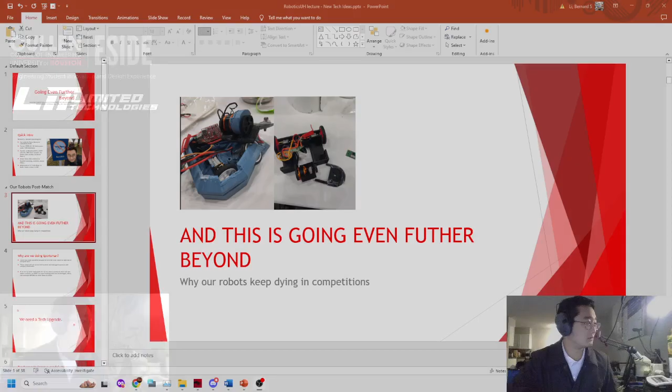So the objective of this presentation is very simple. We need to figure out why exactly we are still in plastic cans, right? Why our robots are still at least a couple of years behind.

Hang on one second. PowerPoint just broke on me for a second. Use presenter view. Okay. What?

There we go. We need to figure out what our situation is, how we can be better, and sort of learn a more fundamental approach, right? A lot of you guys have begun designing Battlebots, and that's really good news. A lot of you guys started building your own, that's also great news. But design without a sort of end goal as to what are we doing here is going to prove to be an issue. So my objective here today is: how do we take our robots and make them go even further beyond? How do we take them and say, here's where we're at now, here's where we're at in the future.

Okay. And then the arrow's not working. There we go. Yeah. So that's my intro.

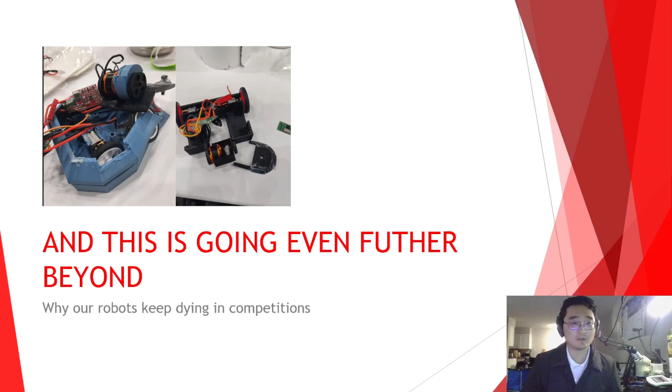So these are the two robots that I was last involved with. These are both Justin's. The one on the top is a snail, which survived very, very poorly. The other one was Justin's own custom, which also survived very poorly. Justin was made the president of the Robotics Club because he sent the most robots to fight. Regardless of success, he's had the most robots actually show up to a competition and fight out of everyone in the club.

And so, from those experiences, he's learned that these robots don't survive full combat most of the time, and they also damage complex and expensive electronics. Right? So whenever we break a Malenki, that hurts our budget a lot, especially because we're poorer than some of the orgs. So really, if we want to build robots that can survive above sportsman class, either in ant weight or plastic weight or fairy weight, we've got to start thinking about new ideas and concepts long before we send the robots into battle. Long before they're at competition, we need to have a good idea of, let's try this technology before we go. Alright? We need a technology upgrade.

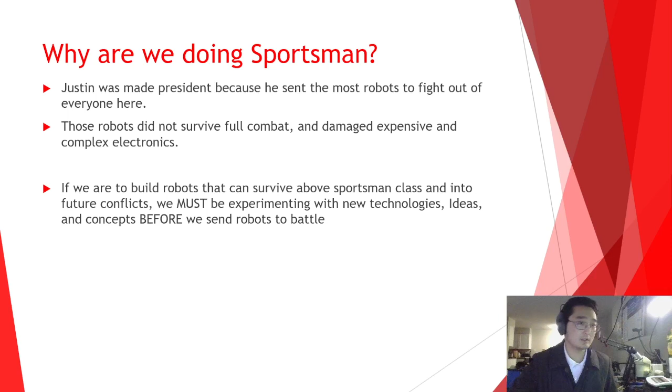And so these are the top 5 ways of improving robots, right? That we should probably be exploring. There's the need for armor upgrades. There's creating more effective weapons. There's understanding how to make sure our electronics survive. We need a better understanding of 3D printing, and we need better engineering design management. These are the 5 things we've got to worry about.

Now, normally, if I was still a team lead at this point, what I would say is, let's talk about this. But having been through a lot of the industry a lot more than you guys, my goal is to go through all of them and what I know and see if any of you guys have any ideas, concerns, if you find any of them interesting, etc. Unlike in other presentations, by the way, interrupt me. If anything doesn't make sense, don't just let it skip on. Ask, because otherwise I have no idea how you guys are gauging, especially because I don't have a camera feed anymore. So just let me know, alright?

We'll get to that, but the big thing is that we need to start prototyping well in advance and testing well in advance in ways that we can test before going to competition. Before even building the robot, we can test some of our ideas long before we get there. So it'd be a good thing to try.

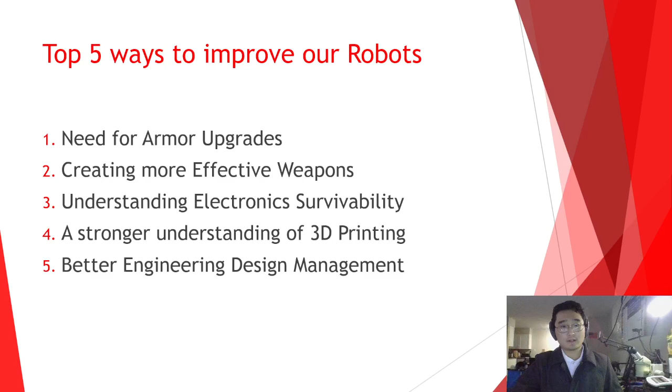Alright, so the first thing we should probably look at is upgrading our armor packages. Armor was the biggest problem that Justin had and faced during his fights, and every single other team besides ours is using some sort of advanced armor, including high school students.

They're working with a bunch of different techniques that either you've seen in competition or you don't really know is a thing yet. And so I'm going to go through the ones that we know how to use, the ones you've kind of seen before, and then the ones that we haven't really tried before, but we know either someone else has tried and it works, or it's possible to do with further funding or experimentation.

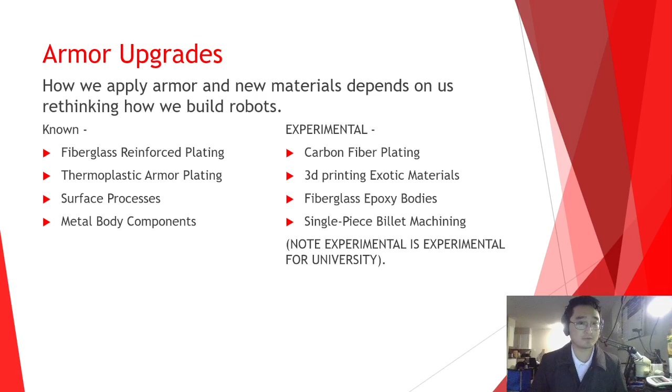The first one, and the most easy one that we should probably start looking at, is something called Garolite. Garolite is a compressed fiberglass reinforced composite. It's very, very effective at 150 gram and 1 pound robots. This is root mean squared. We competed against them very, very early on in our competition cycle. I think this was 2022.

And root mean squared is a robot basically built out of tape and Garolite. But because of its unique design out of Garolite, it was basically indestructible. If we had robots that were capable of throwing it across the room, it would still hold very effectively.

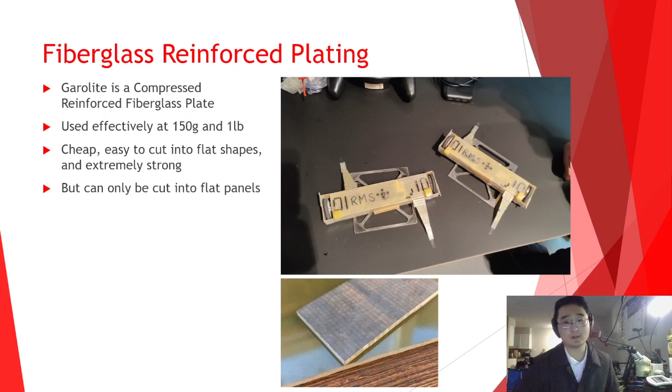The next avenue is thermoplastic plating, and thermoplastic plating is sort of the same concept as Garolite. We take polycarbonate or acrylic, mostly polycarbonate, and we put them into plates on a system to make it structurally sound. The most common way we can see this is in the Viper kits, because Viper kits are everywhere. But you can do that for a wide variety of options. So you can do it.

You can cut it yourself with a hacksaw with acrylic and polycarbonate. Polycarbonate you cannot laser cut, but you can heat shape. So if you have a mold and you have the polycarbonate, you can heat gun it and it will slowly bend. Acrylic will do the same thing, but acrylic is much weaker when you do that. But acrylic you can laser cut. So if we have a laser cutter, which we used to have, RIP Eastside, you can just cut out the exact shapes out of acrylic, and then your robot is ready. At that point, it's like Lego.

For acrylic, 1/8 inch is good for just structural needs where it's not going to take any load, just holding things together without taking damage. And 1/4 inch is for actual structural use, like when a side is going to get hit. It works very well for 1 pound weight class. For most instances, 1/8 is very good for all 150s. That's a generalization though, there are situations where it'll still crack, but it's also a good option, and it's easy to acquire since we've got a bunch lying around.

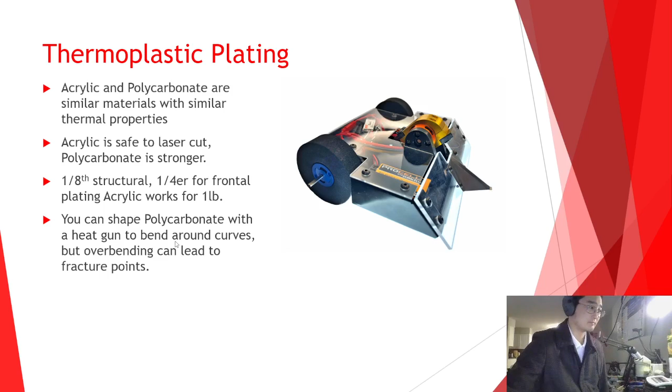The next option we can look at is print surface processing, which is fundamentally very simple. When you 3D print something, you leave tiny little gaps between each layer. There's a lot of ways to fix that, but the easiest is to just coat it in epoxy. If we have a big tub of epoxy and enough time before putting electronics in the bot, we can coat the outside with this glue, which is mostly epoxy, and it'll increase the strength by a decent enough margin that it's worth it.

Grant, it's the other way around. I think it's easier with 150 grams. So if you have a 150 gram bot and you're still 3D printing it out of PLA and don't really know what else to do, just paint it over with some glue and epoxy, and it'll hold much stronger on the exterior.

Yes, it's not a banned material, it's a glue, you can glue it over to whatever. It does work for PLA, but it's really, really strong with PET-G. In PET-G you can get around a 10-15% structural increase, which is why we use that in unmanned vehicles in aerospace. So that's something we should try doing, and since epoxy isn't that expensive — well, it's expensive, but you have enough for a lot of robots — there's a lot of room to test that.

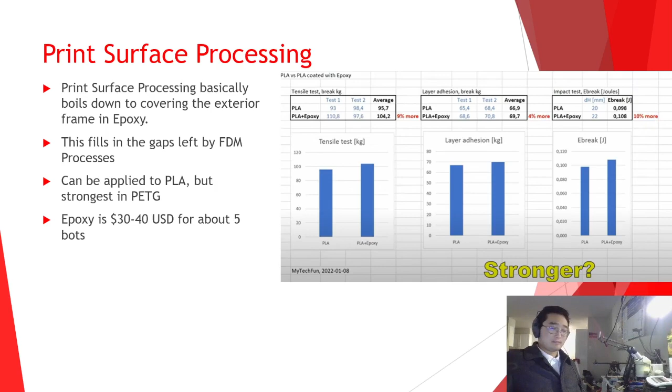Awesome. So the last one that we have an idea of how to do, and it's pretty easy, is one that many of us have seen before. We call it metal body framing. Has everyone here done a First Robotics Competition or a Vex competition?

Yeah, most of y'all. Who hasn't? I think Caitlin. Oh, okay, okay. Yeah. So Vex first best. Any of it? Okay. Well,

There are many high school competitions where you're required to build robots. In those, there's usually standardized frame parts where you can just bolt the pieces together and it'll work, most of the time. It's not very structurally sound because these robots aren't really designed to take massive impact or get thrown across rooms. But on the other hand, it makes it very easy to work directly with metal.

My favorite design that I've seen using metal body framing was - if anyone remembers, the FRC 2x4, like the aluminum 2x4. You remember when you were building FRC robots, we had this very regular shaped metal. Let me Google it for you.

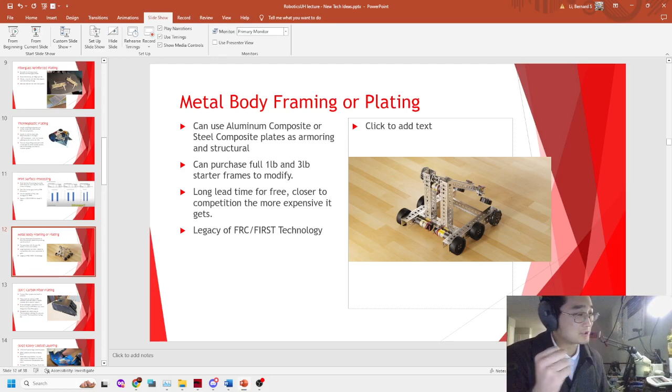Someone just filled in and used that as their body, then filled the inside of it with electronics, and that was their battle bot. It was such a uniquely cute design that I was like, that's a great idea. If we take this and work with it to say, how do we make sure it survives, there's a lot more options you can do there to very quickly get to one pound. You can, and it'll hold in competition most of the time. So you can put together the robot and say, let's test the idea out, let's test the strategy out and go from there.

I'll look, because I saw that robot. I don't remember if I saw it in person or virtual - I saw it in person, but I'll see if I can find a photo of it. Yeah, it's such a cute idea.

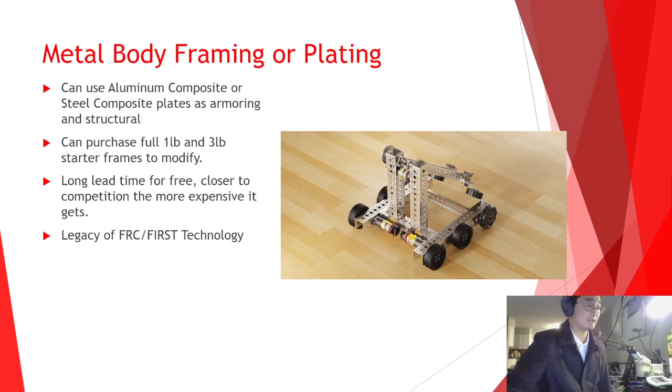Okay, after this is stuff that we haven't done before, and it'd be very difficult, but it's something we'd like to try, and if anyone wants to try it, that's a thing we could try. The first one is carbon fiber or actual fiberglass plating. So Garolite is relatively easy to work with because you can cut it and score it, and it won't really produce a lot of fibers.

With carbon fiber or fiberglass plates, you've got to really think about how difficult it is to manufacture. Carbon fiber plates are very hard to process. They produce a lot of carbon fibers, and those fibers, when inhaled, are very bad. When you cut it, you probably have to go get a specialized machine, or find someone who has the right tools to cut it for you. There's a very low chance that at the University of Houston you can manufacture that yourself.

Back when I was at UH, what we did was we went to...

Justin doesn't know what's going on.

Back when I was working at UH, we went to HTC to manufacture ours. And HTC still has an agreement to some degree. I don't know how much of it's left, but if you reach out to them and say, hey, I want this part manufactured, I'm the robotics club at Houston, can you help with that? They'll probably say yes in exchange for you sticking an HTC sticker on the side of it.

So the other thing is that carbon fiber plating is also, you kind of have the same problem as Garolite, where you have to think about it only as very rigid plates. There's not much bending. The other challenge with carbon fiber plating is that if it actually breaks - if you design it right, it won't break unless you design it to break. But if you design it to break, then it's very dangerous to handle. And so if it fractures or fibers off or peels, you'd have to throw away the entire plate. It's very not recommended to try and re-glue that plate back together.

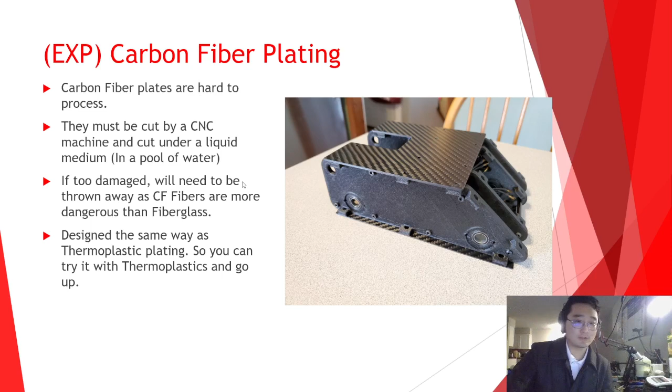Okay, epoxy coated layering is the next thing. I am working on this as a research paper. It's very hard when you don't have a material science lab, but I'm working on it. The idea is that when you have a 3D print, right? So like this is a 3D printed chest plate. What you do is if you apply epoxy over it, it'll hold a little bit.

But if you apply fiberglass plating over it, or carbon fiber, like fiber onto it, and then epoxy that to the plastic, suddenly you go from 'I have a piece of plastic' to 'I have a carbon fiber thing' or a plastic thing, right? And since it's bonded directly to the plastic, it makes it a lot stronger in most aspects. This is something that is very experimental, and I'm still working on to get a good feel for it. But you can design things with significant weight reduction, just putting fiberglass layers over it, and it will work great - at least from me crashing 2 drones into a wall and going, oh hey, they didn't even break this time.

So right now this has mostly been done on cosplay. It has not been... well that's not true. Over here you can see this guy on YouTube did one on wood, did one on a regular piece of PLA, and then one on a 3D printed PLA, and found the PLA one was the strongest of all three, because the little ridges in the 3D print allowed the fiberglass and epoxy to hold better to it.

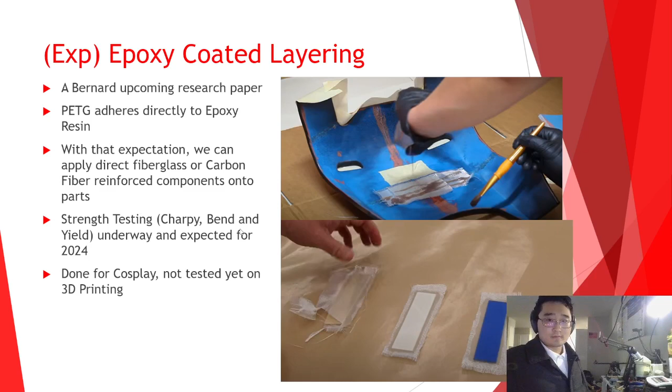Alright. Okay, yeah, I'm recording this.

Alright, the next one we can explain is exotic 3D printed materials. John is a huge fan of these. Although I'm a little bit, and so is ASME, but I'm not.

There are many 3D printable materials besides PLA and nylon. This chart is mostly metal fibered, but you can sit down and say, hey, what kind of material should we try besides that, and will it help?

The most common one for our robots is TPU. TPU is nice because it doesn't damage the nozzle much. So you can use it the same way you use PLA, and it's not going to break anything, right?

It's also much more flexible, so it's almost like rubber. I think it's actually a latex material. So when you squish it, it'll squish.

So if you combine that with something nice like Garolite to provide that extra strength, you can throw your robot across the room and it'll be fine because the squishing will take most of the impact. And then if it gets hit or stabbed, it'll still hold because the Garolite will take the rest of it.

So that's something that Justin experimented with. It didn't go very well because of Justin, but it's something that we can try, right?

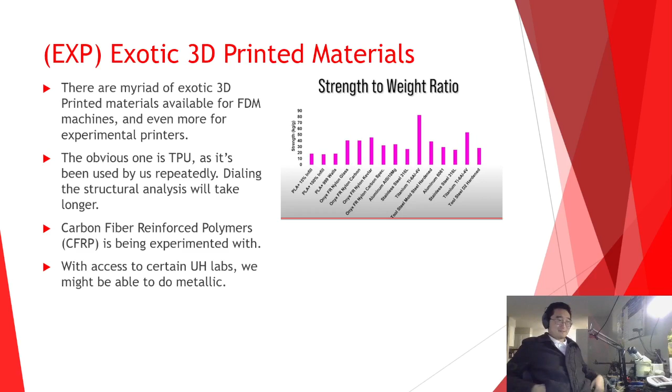But yeah, okay. The last one that we should talk about in terms of material science, and this is solely materials, is billet machining, which is ridiculously expensive but ridiculously strong. How it works is you take a physical cube of the material you want, and you just slowly start cutting into it. You cut the robot shape out of it. This requires very, very long, very expensive CNC manufacturing. If you can buy it, you can buy it, but it'll cost around like $300 a bot.

Yeah, so it sprays the liquid and starts cutting into it, and then it slowly mills shapes out of it. But yeah, it is ridiculously strong. If we actually go to an actual 250 combat robot, like a big one, most of them are made out of this now, because it is just so unbelievably strong that it's worth it.

The other thing that's really nice about billet machining is that if you learn how to do it, if you learn to design with it, you will immediately get hired by somebody. Most likely Lockheed Martin. Because most of our aircraft are built out of billet machined parts, once you get the hang of it and how to design with it, it's a very, very good career path.

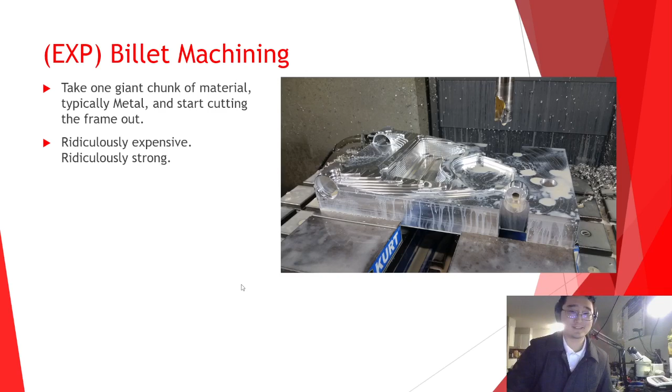Yeah. Yeah. Alright. But also, good luck finding a CNC lab that'll let you learn it. Yeah, that's money. Alright, so that's all materials. Any last questions before we move on?

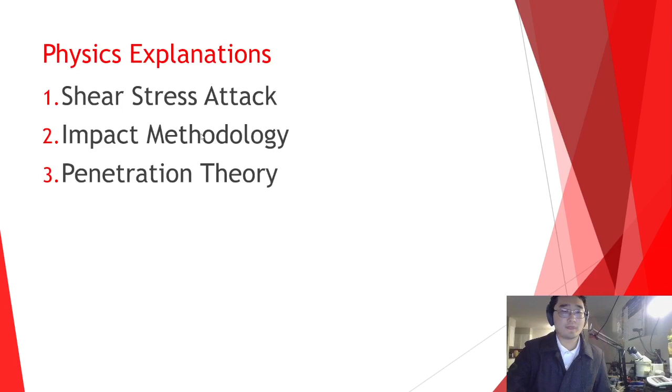Okay, so this is wrong. Okay, well, in terms of weapon effectiveness, we need to understand there are two ways to measure the effectiveness of a weapon. The first is just the kinetic energy, and the second is momentum.

Right, so if anyone here remembers Physics 1, I know some of y'all are in graduate school, so it may have been a while, and we've got one high schooler, so I don't know if you guys have learned it yet, but, oh my god, I'm so sorry for you. RIP Louisiana's education system. But, yeah.

notice in both of these equations, momentum and kinetic energy, there are two variables that are the same. What are they? Mass? Who wants to take the other one? It's pretty obvious. Velocity. Right. And so, with momentum, if you make something very heavy and spin up good speed, you can throw things across the room. If you have something that weighs a bit, but it's also very fast, you can start doing some real damage. So let's look at how that translates into material science.

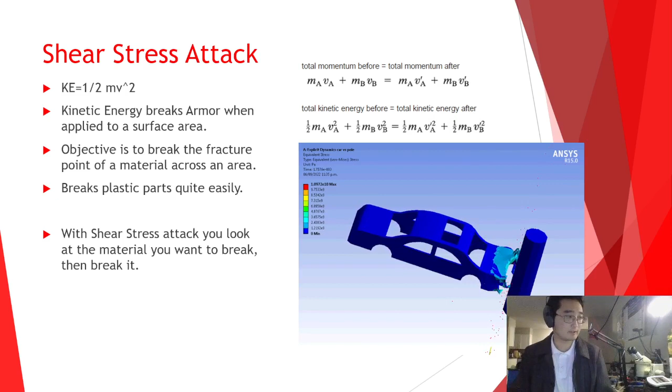When we talk about breaking a robot, shear stress attack is the first one. The shear stress attack is where you focus solely on the kinetic energy, because what you're trying to do is shear the material. You're trying to take the material and rip it, right? When you're doing that, either by hitting the robot, or when it hits the wall of the field, or when it lands the wrong way, you impart this kinetic energy shock onto it that causes this problem. That's shear stress.

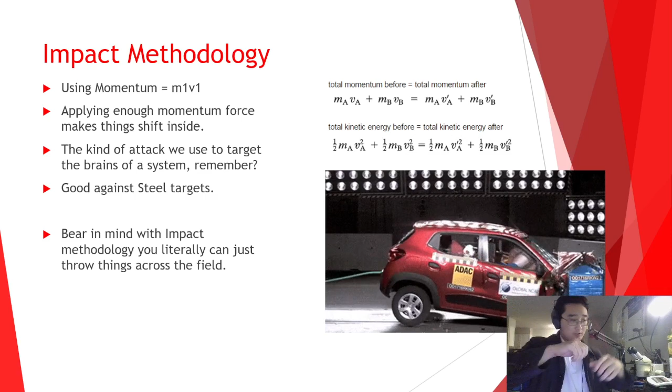Impact methodology is purely momentum, right? If you have a robot and you're slamming it into a wall or into something, what you're doing is you're applying a shake to everything inside, like the electronics, the battery, all of it. You're trying to dislodge as much of the system as possible. And so if you have a screw, that screw's going to come loose if you hit it with enough momentum, right? If you have a wire that's improperly soldered, then that wire is going to rip off if you just shake the box hard enough.

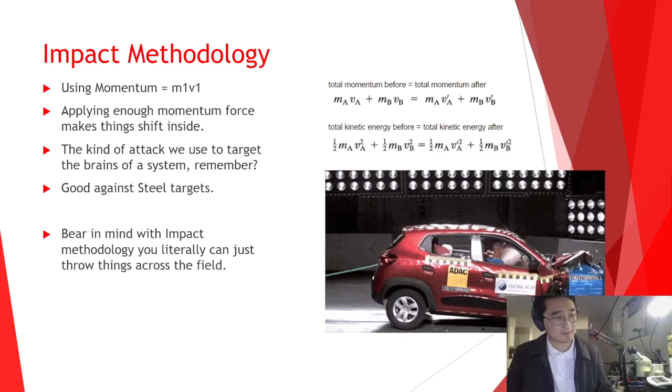And for momentum attacks, it's much more than shaking a box hard enough. It's literally like slamming it repeatedly into a wall. And since Battlebots go through that, it's really, really good, right?

The last one, that John is a big fan of, and that's kind of my fault because I taught him it, is something called penetration theory, right? The thing that both these methodologies account for is just mass and velocity. And so you can take as much mass out of your robot and just build a really heavy weapon that spins really fast. And it'll scare the hell out of people.

But if you want, you can also go the other way. We can make a very, very small, very, very thin weapon and just narrow the amount of area you need to cut through the target or punch through it. So if you have a piston that can punch something, if you reduce the surface area of it to a reasonable amount, you should just be able to punch through the metal, or punch at the metal to where it bends or impacts, instead of applying that force laterally over a wide area.

In the real world, this is basically everything we have to deal with, because penetration theory is we're being shot at, help us, right? But it's also worth looking at here. It's very difficult to pull off because the smaller the cross-sectional area of your impact, your kinetic equations and momentum equations break down a lot. It doesn't work the same.

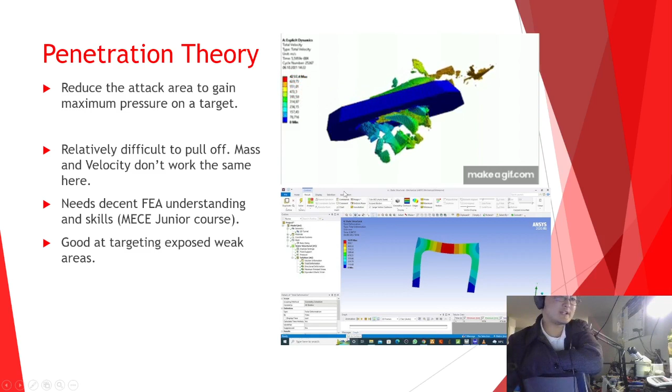You would need a fundamental understanding of FEA, which is a mechanical engineering course. Finite element analysis, which is simulations, if you see these two here. But if you have a good understanding of simulating impacting of targets, then you get a good expectation of what is a weak area you can punch through. And so that's penetration theory.

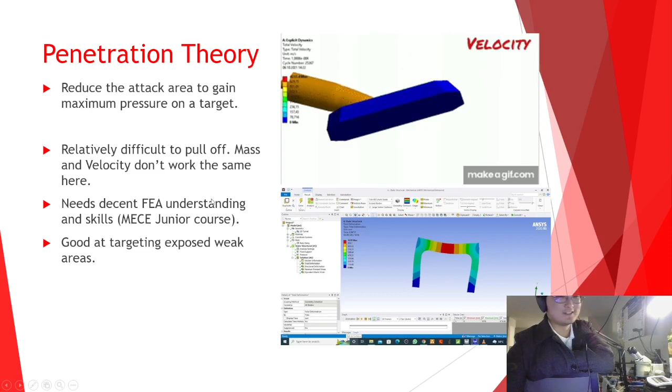Say again, John? No, you don't. It's more fun. It's more fun sometimes.

All right. The next thing we should talk about is looking at this in reverse: electronic survivability. So all of this, weapon effectiveness, we look at exactly in reverse. This is called the brain concept. I learned it from Dr. Pepe, which is Dr. Luis Contreras Vidal, who's in charge of the brain lab here at UH.

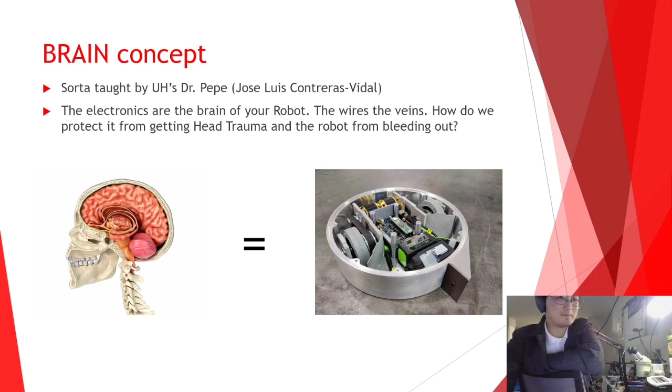Whenever you're designing a robot, the electronics are the brain of your robot. The wires are the veins, and quite literally, we are exposing our robots to football levels of chronic traumatic encephalopathy, which is brain damage. So how do we protect our robots from getting hit like this?

There are three ways. The Malenki is probably the most expensive and most complicated part of your robot, especially if you've never built PCBs before, or even if you have, it's a very difficult thing to repair. So when we build electronic systems, we protect them from three things. Shock and impact protection, which goes back to momentum theory. Bending protection, which happened to someone at Turkey Tussle last year. And thermal protection, which happened to us at TAMU.

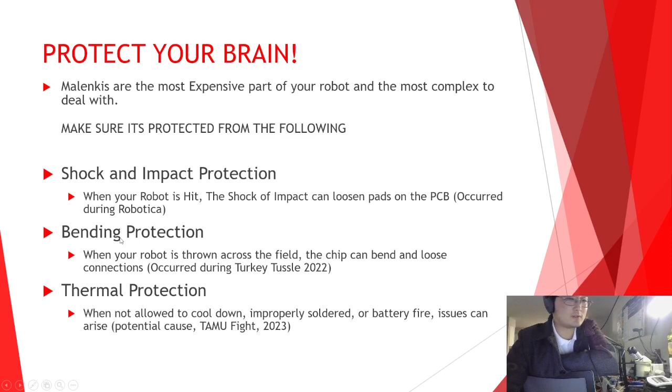So let's look at the maximally invasive lobotomy. Okay, the first way is shock and impact protection. When you have a Malenki inside a case, taping it down to the floor is just the start. If you just hot glue it, the hot glue's not going to stay very long. But if you tape it and then hot glue the edges, you have a buffer space, so the hot glue gets squished just enough to hold your electronics together.

It's also about where we place our wires, because our wires are also going to come loose. A lot of the robots I saw in the club were literally, let's stuff all the electronics in there, hot glue or tape it down and hope it works. It's not a good idea, because if we put the Malenki on the side panel, it's going to get hit and won't survive very long. So we should think about where we put our electronics and how we protect them.

Put walls with a little spacing between the wall and the Malenki, like 3mm. And when you build the robot, fill it with something. Ethan and I experimented with foam: you put the Malenki in a little foam box, and the foam box in the robot. That way the Malenki doesn't shake as much and doesn't bend easily. There are other methods like double-sided sticky pads. If you just have a little bit of spacing, it'll be fine. Any questions on that?

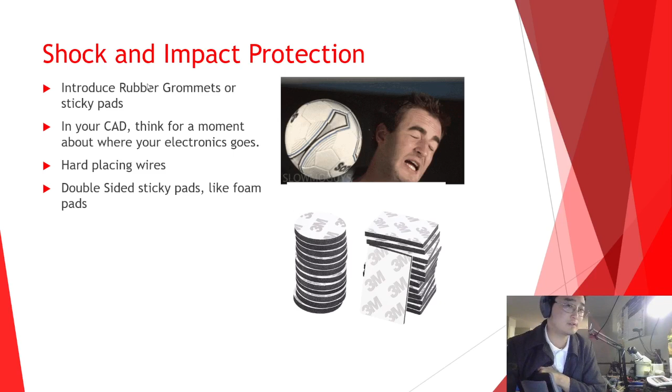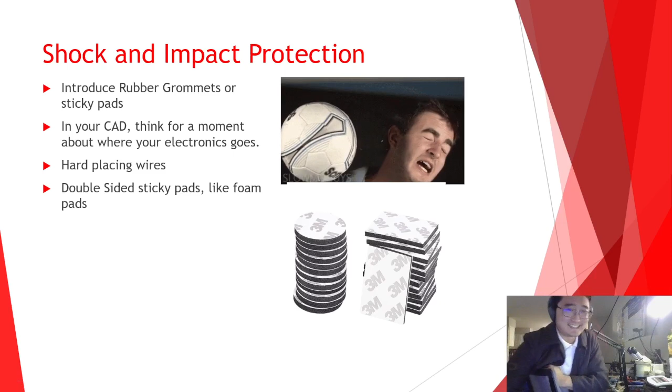All right. I love showing this video just because it's a great way of showing what TPU will do. But yeah, okay. The next one is bending protection, right? When your robot's thrown across the room, it's not going to be the same shape sometimes. Even if the same shapeness is a little bit wacky, right?

Even if the bending of it's very, very minuscule, not noticeable, that does a lot to damage electronics. Remember, a resistor on the Malenki at smallest is 1 by 1.5 millimeter. That's tiny, right? And so when it gets thrown across the room and it bends just a little bit, it'll do that. So hard mounting it doesn't really work the same, but mounting it to a very rigid panel, if you can guarantee the panel is going to always be rigid, sure, but nothing is ever always going to be rigid.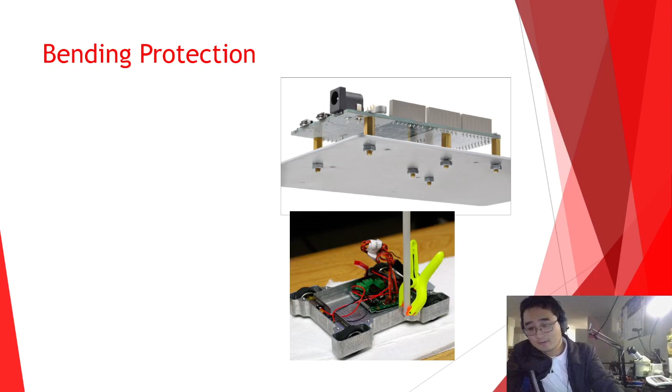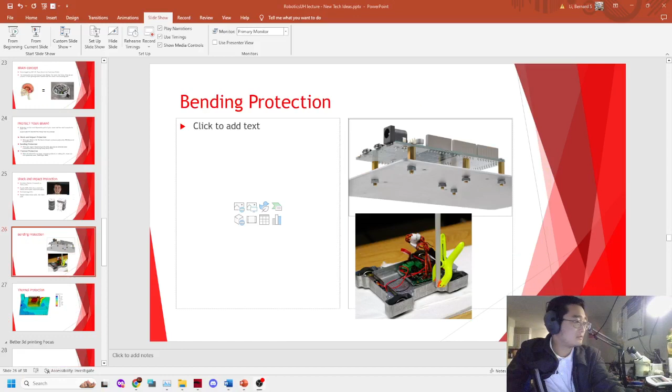Uh-oh. What's going on? Shoot. What? Hang on, something went wrong. Hello? Ah, my microphone is... Lie down! 1 minute, guys. Yo. Recording resumed, and we're back.

Okay, so from current slide. So just as I sort of mentioned, thermal protection is a big issue. When you have an ESC for the weapon motor, you don't want to stick that next to the Malenki because it'll heat up, right? Those ESCs get really hot, especially when you don't have good airflow, and so that's a problem. Now, the easy way of solving this for ant weights and for fairy weights is just once the match is over, get it somewhere cold. So like, get a fan and just throw it at it, let it cool down a little bit before the next match.

But you can also try and do active cooling, either if your weapon is a spinner, you can sort of spin air into the system, or you can do it some other way. But just don't do what we did, which was take the Malenki and stick it on top of a very, very hot ESC, just a lot of noise, and cause issues. Make sense, guys?

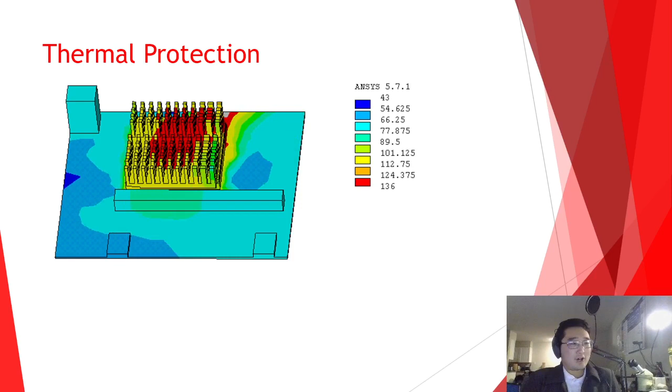Awesome. Alright. Yeah. So the next set of slides here are a little bit confidential. TJ, I'm okay with you looking at it because I don't think it's going to do any major damage. But I did a lot of this research for my startup, so I'm going to pause this. It's not going to be recorded online. Okay. We're good on that.

The last thing we should talk about, and this is going to be a very, very short thing, is process management. And this is kind of a fault of everyone, but let's think about it. Let's look at it, right? The kind of manufacturing we're doing is called just-in-time manufacturing. And this is a real engineering concept. Whatever we need for a robot, we design the robot. And then after we're just done designing the robot, we order all the parts, and as soon as every part arrives, we install it onto the robot. This is called just-in-time manufacturing.

The problem with just-in-time manufacturing is that it's very, very, very rigid. Right? It also ends up with a sort of bad expectation that we can build our robots last minute.

Which I know all of you guys immediately sort of recognized. So, if you want to design something new and creative, you cannot do just-in-time innovation, right? The way you fix that is you do something called selective integration, which is: I know this works, I know this doesn't. I'm going to get all the parts that work now, I'm going to get them in quickly, get that all working, and then be done.

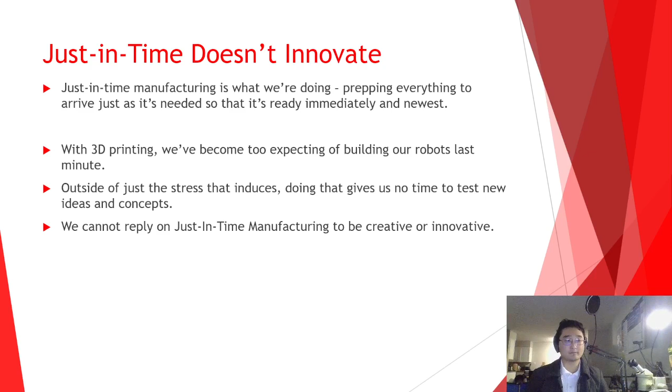Because as officers, I have shouted at them about that. They are thinking about it now, right? So what we need to do now is say, well, what can we test in pieces before all the parts arrive, right? Let's order some Garolite. Take this Garolite, let's test it against a normal PLA bot. We don't need to test it by putting it into a Battlebot. We can test it by snapping it, breaking into the mechanical engineering labs and testing it, or just throwing it against the wall, right? Come up with an idea for how we want to test it to be stronger, how we want to build the system, what ideas we want to put into a concept, and go from there.

If everyone here who's designed a BattleBot goes back through this slide and says, I like that material, I like this new design process, I like this idea for this truss structure. Don't wait. Get a test part printed. Print just a wall with that part on it. Apply your Garolite and go test it. And then when you know it works, we don't end up blowing our entire budget trying to build all of those at the same time on new untested theories. I'm staring at you, John. Okay? So when you get out of this mentality of just in time and go into experiment, test, validate, we will really start kicking ass.